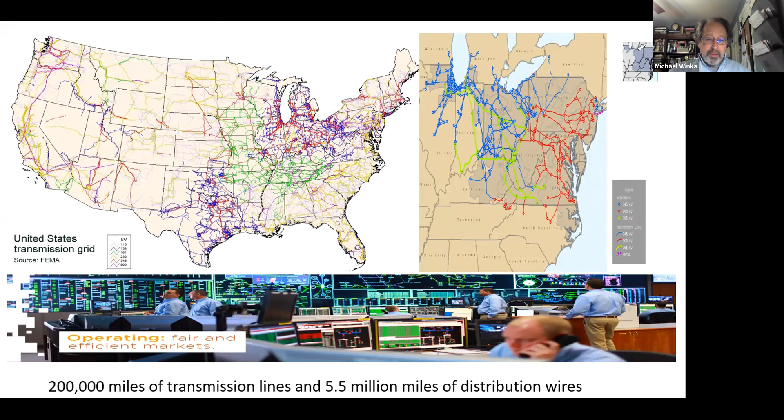Okay, so this is the electric grid. It's huge. You can get an electron from California and move it all the way to Maine. There's 200,000 miles of transmission lines crossing the country. This is the natural gas intrastate and interstate pipelines. There's 300,000 miles of pipeline. And these are the oil pipelines. There's 200,000 miles of pipelines. And you can see most of the gas coming from Pennsylvania and Texas, Oklahoma, the hotspots for oil and gas. So you can traverse the United States 30 times with all the pipelines and wires that we have out there.

And if folks really want to ask a question, you can raise your hand. I might not be able to see you all. Maybe Steve, you can monitor that. If it's a really pressing question, I can stop and answer it. Sure, I'll monitor the chat. Okay, or I'll just look at the participants for a hand.

So 90% of the energy we use to do work is basically from the combustion of fossil fuel, just about that number nationwide. When you burn a fossil fuel, you're releasing the sequestered materials that are in the fossil fuels. Organic material on the earth today, in 1 million years will be fossil fuels. They have emissions. Most of those emissions, NOx, SO2, mercury, cadmium, lead, can all be controlled really well. And I'm an engineer, so don't hold me back for English. Really well with back-end control technologies.

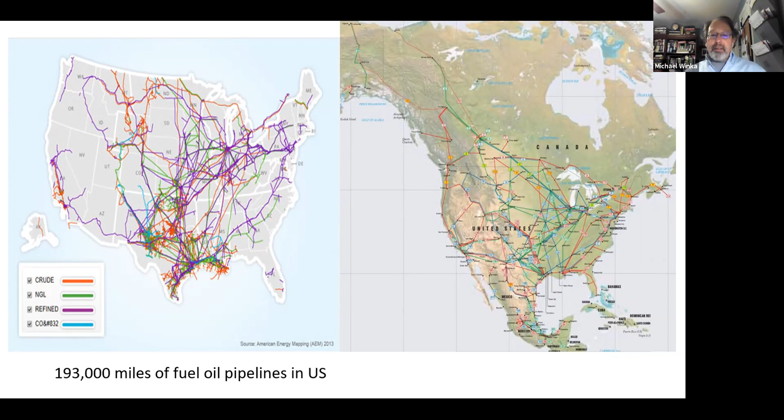And the federal government has its place and the state has its place. And you can do this somewhat from the top down, but you can't do all of it from the top down. It really takes a bottom-up approach to managing this program. And I'll talk about these issues and how you put those things together.

So when we talk about CO2 emissions, this is from the Energy Master Plan. It's great to put these things in sectors so you can start developing strategies. You can see transportation is the largest greenhouse gas emissions in New Jersey. It's over 40%. Residential and commercial, mostly heating of buildings. Electric generation followed with 20%. Industrial, same thing: it's heating processes, thermal processes, burning oil or natural gas. And then the rest, waste generation.

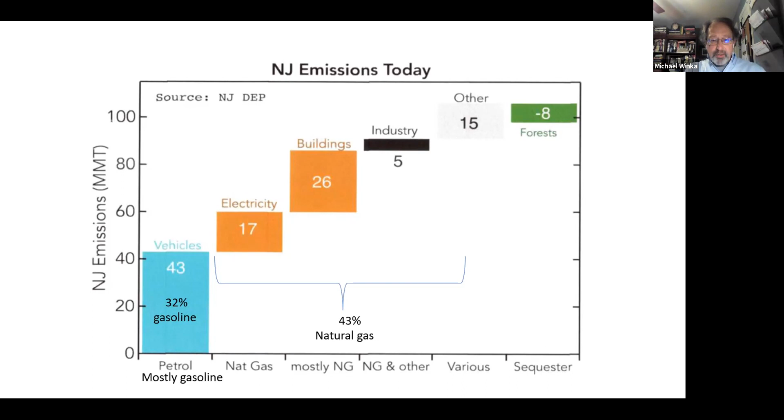You could split that up by the fuel types that generate those emissions. So in the transportation sector, 32% comes from gasoline in New Jersey. But here's the interesting point: in electricity, buildings, and industry, 43% of our emissions come from natural gas. So you're going to build strategies to address gasoline, natural gas, buildings, and the transportation sector. And those are the things you'll see in the Energy Master Plan, and in Middletown's Energy Master Plan, if you build an Energy Master Plan.

So when you put those things together in terms of the goals, the strategies roll out pretty simply. Advancing clean transportation with electric vehicles, advancing clean energy with renewable energy, advancing energy efficiency, advancing building electrification, and a smart grid. So you can tie all this together with smart grid, and you can go through the Energy Master Plan and look at how it sets the goal for 100% clean energy and an 80% reduction in greenhouse gases by 2050. That's the goal in the 2019 plan. It may be changing. I know the federal goal is 50% by 2030. And we'll see how that goes in the Glasgow agreements.

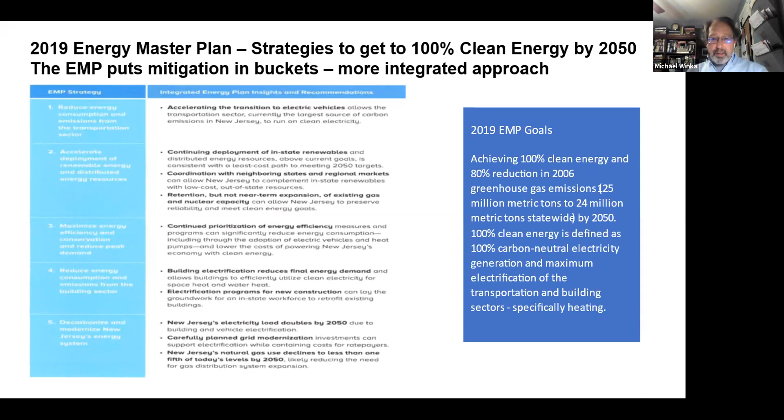You can, again, look at that from different fuel types. So fossil gas, pipe gas, gasoline, petroleum. And you can see if you apply those strategies, the decline in emissions over time to get to the goal. And that was the modeling that was done on the least cost scenario to get to those emission points. There's several different pathways to get to that endpoint, but there's one least cost pathway that gets you there.

You want to do something else? If you're saying you want to roll out electric vehicles slower, you're going to have to do something else that might be more costly in the end. Or if you don't want to electrify buildings, you may have to pay more for solar. So that's the strategy. In the Energy Master Plan, they looked at 12 different variations on different strategies on how to come up with the least cost.

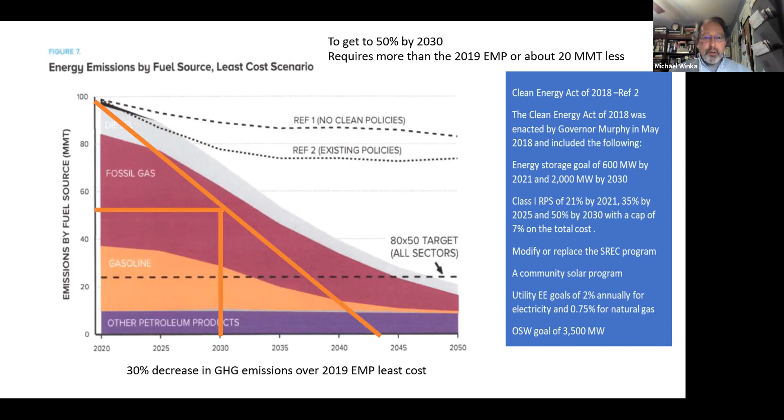But again, if you want to accelerate that and get to 50% by 2030, you can see that bold line that was thrown in there and where you have to improve or increase your policies. I'll talk about that in a second.

So the Energy Master Plan looked at electrifying buildings, electrifying transportation. So electricity is going to double. You're going to go from 75 million megawatt hours of use to 150 million. And you're going to pay for that. You're going to have to build out the infrastructure and you're going to pay twice as much for electricity. But the good news is you're going to reduce gasoline and natural gas and diesel and the cost for that.

So when you net out that I'm reducing paying for gasoline, but I'm increasing my cost for electricity, it's actually more efficient to use electricity than all of these other types of fuels. You're more efficient, you're using less energy, and overall it's about the same amount of cost.

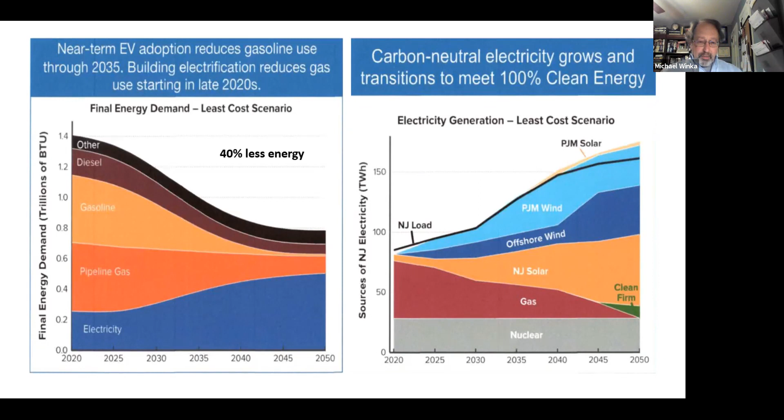And you'll see on the right-hand side of the screen is the increase in clean energy generation over time. We go from natural gas and nuclear about 40%, 50%, depending on the time of year, whether natural gas is high, whether nuclear costs are lower. And then that increases to solar and wind in 2050 with some nuclear baseload staying in.

And this is the cost for meeting those strategies to get to those reductions by 2050. You see this in the Middletown Energy Master Plan, Steve, you reported it, a 0.2% increase in GDP. A 0.2% increase in GDP is $2.1 billion over the business as usual case. And that $2.1 billion is a lot of money when you consider the state's GDP is $600 billion. That's where you get that. It's only a 0.2% increase in the total GDP.

So, and then on the other side of that equation, in terms of benefits, it's about a $4 to $6 billion benefit versus the cost. So you have a benefit to cost ratio of about 2 to 3 times, which anything greater than 1 is deemed to be cost effective. In the modeling that was done for the Energy Master Plan, you have a cost, but the benefits far exceed the cost as you move on.

And that's to get, again, to 80% by 2050, 80% greenhouse gas reductions by 2050, and to get to 100% clean energy, which is defined as carbon neutral electric generation, not carbon free. So you have a ways to go if you want to change that. So in summary, the good thing that came out of, and you can go to the website and look at the presentation that was done.

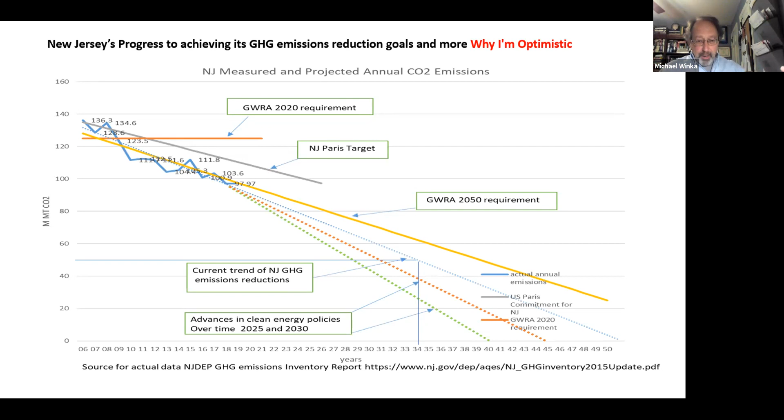So another reason I'm pretty optimistic in terms of where we're going is just how policies grow. I showed you that chart of the existing policies, and the existing policies are not going to be able to take us to 2050. We need more. So I'm going to show you how policies grow and how they expand over time.

So when energy was deregulated, when you can go out and buy electricity and natural gas, people on the environmental side said, people are going to buy cheap coal, we're going to get higher emissions. The countervailing part of that in the energy deregulation law was the renewable portfolio standard. They said, okay, you suppliers that are going to sell electricity, and you may sell cheap coal electricity, you have to have some renewables in your portfolio.

And the way that works is a renewable generator generates electricity. They put electricity into the market just like anybody else. And when they put a megawatt worth of electricity in the market, they get a certificate to represent the attributes, mostly environmental benefits, of that electricity. They get that one certificate, and they get to sell that certificate to an electric supplier who has to comply with the renewable portfolio standard.

And just a short way to make that, here's the rule that gets put in place. The RPS rule says this is the amount of renewables you, third-party suppliers or LSEs, load serving entities, have to have in your portfolio that you sell to customers. They go to the market to buy them. Generators generate those certificates. They sell their electricity, then they sell their certificates separately, and that's how the system works.

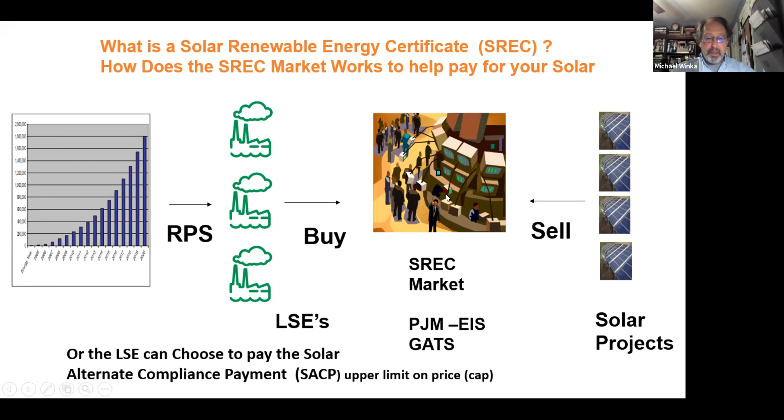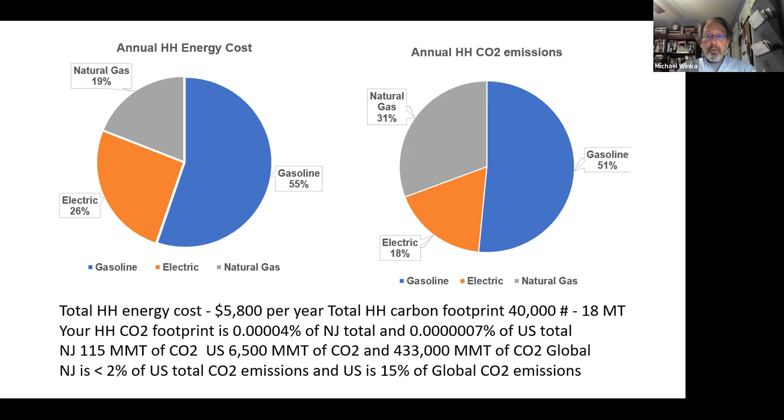And 80% of that cost is in gasoline and electricity, but over 80% of the emissions are in natural gas and gasoline. So again, at the household level, it all depends. Do you want to save energy and save cost, or do you want to reduce greenhouse gas emissions? Some of that is an overlap, and I'll talk about that, but some of that is different policies and different programs.

That's good on an average basis, but you want to know, what am I doing on a monthly basis? You can go to your utility and ask them for your monthly data. They will send that to you. Every utility does that now. But that's monthly electric and gas. You can figure out your mileage on your car by going to DOE and EPA in terms of gas mileage. And every utility now has an energy home calculator. You can go to the utility, plug in some numbers about your home, your age, type of insulation, windows. It takes you about 20 minutes to do that.

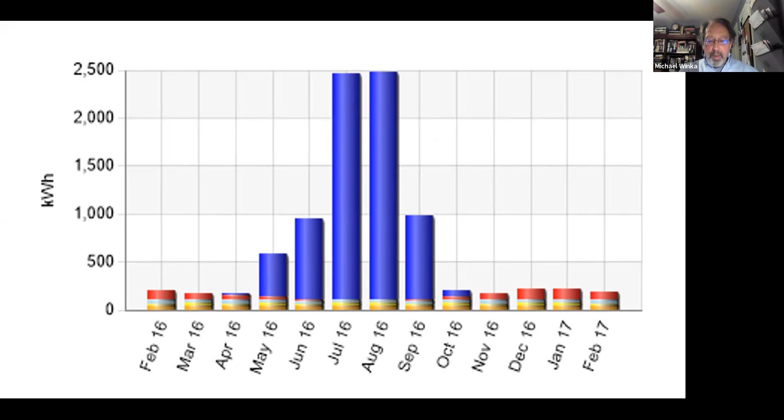And they will spit out a chart for your home saying, here's the electric energy use that you use. And based on the rate, here's the cost. You can see on a monthly basis what you're using, how much you're using. That blue is my central air conditioning system, although a little less than that. You can do that for natural gas on therms in terms of heating and hot water systems and cooking.

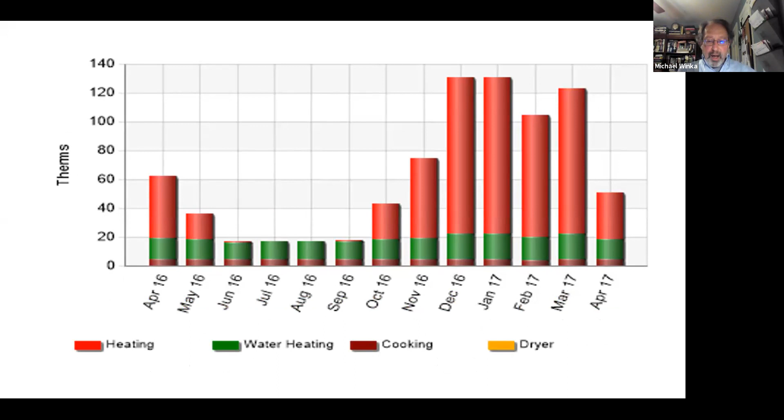Once you do that, you can then take this rule of thumb for building solar. So for every kilowatt of solar that I install, I know I'm going to generate 1,100 kilowatt hours of electric energy. And it's based on the amount of solar that's hitting New Jersey per meter squared and the efficiency of panels. But that's a rough rule of thumb that we use in terms of calculating the amount of energy that's going to be produced for the amount of kilowatts that you install.

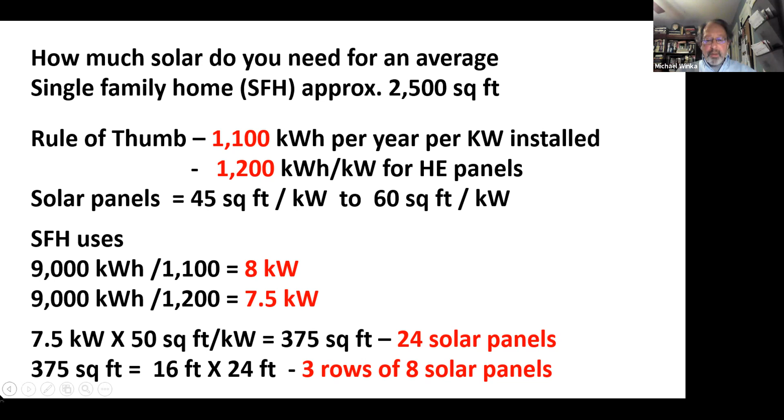And you can just do that in reverse. You need 9,000 kilowatt hours of electricity, you need an 8 kW system. It's going to be about 24 panels on the roof, about 16 by 24. So you can go out and look on your roof. Do I have enough space? Can I put that much solar on my roof? Can I carry the entire load of my building? And then we'll talk about cost.

There's a real simple program that's out there called PVWatts. You plug in the DC size of the system. I put in 7 here. Again, you can put in whatever number you want. You can go on there, it gives you a little Google map. You can digitize your roof space and it'll tell you how much you can fit on your roof. There's average system losses that you put in there. You put in the slope of the roof, typically 20, 30 degrees, and whether it's south facing, east facing, west, and you put in the number for the kilowatts.

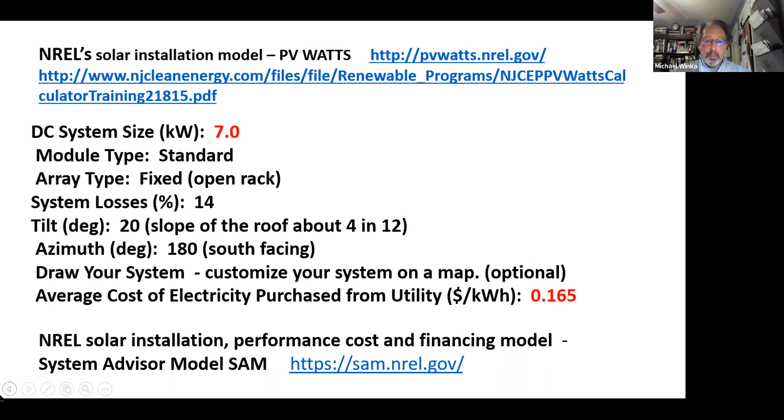And it'll come out with a chart that says, on a monthly basis, the amount of electricity that you're going to generate and the amount of avoided costs that your system's going to generate. Real simple stuff. And every solar estimator that's out there uses this program. It's real simple to use. It's a DOE program, it's run by NREL, the National Renewable Energy Lab, and it's free. You can just go in there and plug it in and play with it. It takes you 5 minutes to put in your zip code or your address, find your home, and then run the model.

Then you can compare your energy use on a monthly basis to what you're generating. And you can see here, I'm using more electricity. On an annual basis, I'm going to carry the entire load of an average home, but during the summer, I'm not going to carry that. And that's where net metering comes in. So net over the year, I'm going to have a 0 electric bill, but in the summer, I haven't put enough solar on the roof to net out my bill during July and August.

What you can do is you can then decide, you can do this one of 2 ways. You can do energy efficiency before and decide you're going to put in a smaller system to carry your load, or you can build a larger system and put in energy efficiency after and carry more of your load and have more electricity that's generated, and be able to make decisions about other things as you go down the pathway.

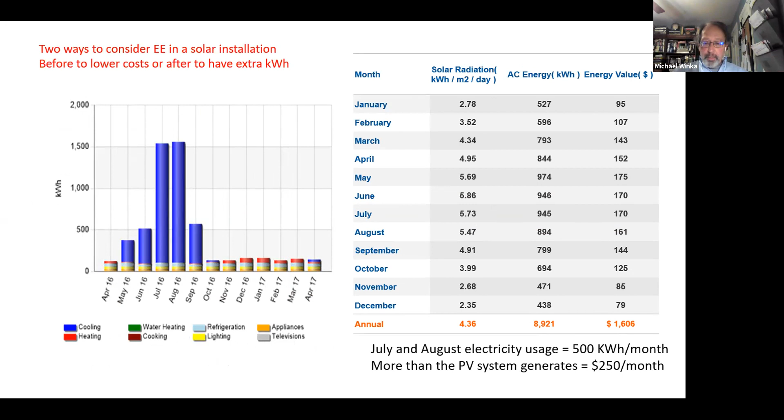And then you have to understand what the cost is. It's $3 a watt installed for that 7 kW system, $21,000. The way you get that, there's a US DOE lab, NREL and LBL, that publishes this data on an annual basis. It's called Tracking the Sun. They will tell you what the cost is for a solar panel in the US on average. They'll do it for residential, commercial, utility scale. They do it by state. So you can look at New Jersey and see whether it's below or higher than average. And typically New Jersey is below average cost because we've been doing this for a while.

You put in that cost, there's a 26% federal investment tax credit. So a 7 kW system will cost you $15,500. To calculate your simple payback period, you have to know what your revenues are. And that revenue is just the net metering avoided cost and how many SRECs you're going to get. In the past, I talked about the renewable generators selling in the market and people buying. That was a competitive system. Now it's a set system.

You get $90 for every megawatt hour that you generate. It's called the Successor Solar Incentive Program, SuSI, but it's SREC 2. You get $90 for this first tranche of 150 megawatts. So you know what your SREC values are going to be, and you know you're going to get them for 15 years.

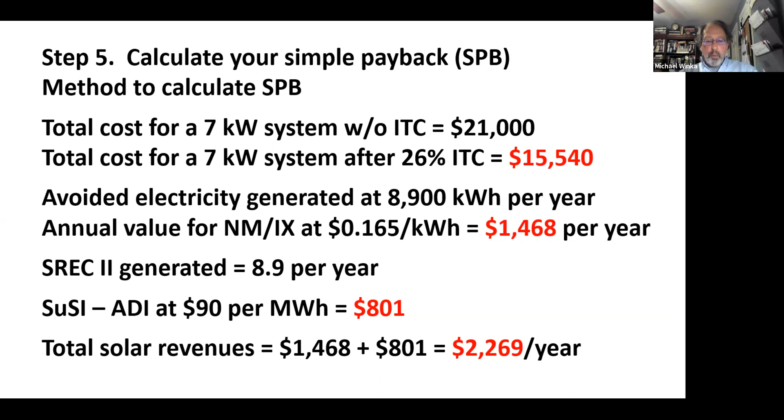You know what your avoided cost for electricity is. It's just under $1,500 for avoided cost. That's 16.5 cents per kilowatt hour for almost 9,000 kilowatt hours per year. You know what your SREC values are. Your total revenues are $2,269 per year.

You just divide that into the cost of the system with the investment tax credit, and installing that system will get you a simple payback period, not including the cost of money or discount rates and all of that other stuff, but a simple payback of less than 7 years, just on the avoided cost of electricity and the SREC. So, a simple return on investment of about 14%, maybe 15%.

Pretty good, not bad in terms of investments. Probably beats what your 401k or your pension plan is doing currently. So, a pretty good investment along the way.

You can pay for that system up front with cash, or you can finance it. You get all the benefits. If you don't want to do that, you can lease your roof space, or you can do a power purchase agreement. You don't get all the benefits, but there's no upfront cost and no maintenance of the system. You get the avoided cost for electricity, but all of those other benefits roll to the lessor.

So another thing to talk about is batteries. Batteries are high cost now. Their costs are coming down just like solar. In 2003, solar cost $10, $12 a watt installed. It's now $2 or $3 a watt. So batteries are coming down, but right now it's pretty expensive.

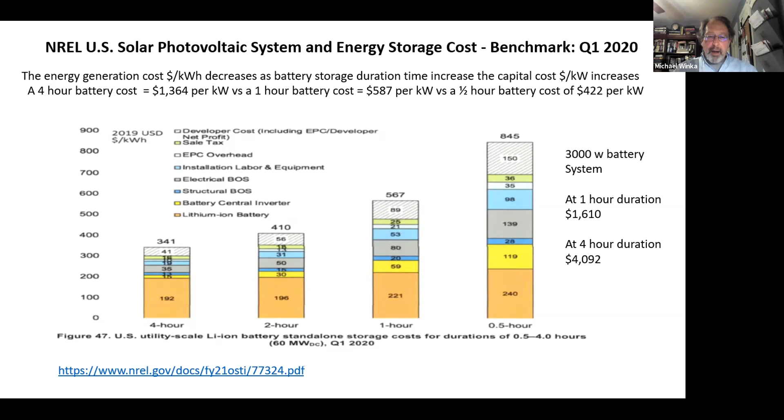At this point in time with net metering, you have to think, what do I want batteries for? I want batteries maybe if the grid is out for some period of time. Do I need all of those batteries to do that? You can think about how many or how few in terms of batteries. You can dip your toe in this water for a little bit of cost and see how it goes.

We talked about solar and storage, and I said that's the linchpin to putting this all together. We're going to talk about EVs and then electric heat, building electrification, and some of that. So the way you're going to change the oil and gasoline demand curve is with electric vehicles. And the only way we're going to get to 50 by 30 is changing that oil and gasoline demand curve. And the only way to do that is with electric vehicles.

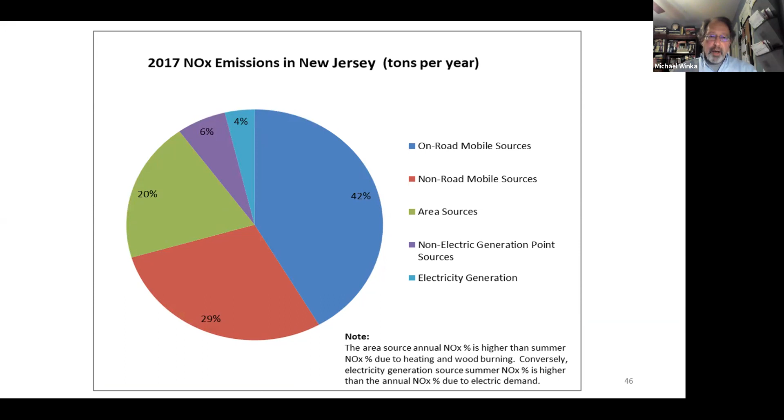The other benefit that comes along with that is the NOx emissions and particulate emissions from vehicles are pretty high. So you're not only getting CO2 reductions, but you're getting NOx reductions and particulates and a bunch of other things. But to buy a new EV, highly expensive. So a Model X, $86,000, even a Mini electric base price at $31,000. You want to replace that battery pack, it's going to cost you $15,000.

But the good thing is because there's a number of EVs on the market, and they all got a rebate from the federal government, they're lower cost. There's dozens of EV models that you can buy used out there for under $20,000. You can buy a used Leaf for around $10,000. It probably has a good life in the battery, but if you want to replace the battery, $5,000 to replace that battery, stick in a level 2 charger, that's $17,000.

You get 0.3 kilowatt hours per mile. You get an 80-mile charge. It's not great. The Model X has a 328-mile range on a charge.

But to think about this, if you had a 40-mile round trip to work 5 days a week, and you're going to go 10,000 miles with a vehicle that drives an average 25 miles per gallon, you need 416 gallons. That uses about 48 million BTUs, and the cost on an annual basis at $3.20 is about $1,300. To drive that electric vehicle the same miles per year, you only need 3,536 kilowatt hours.

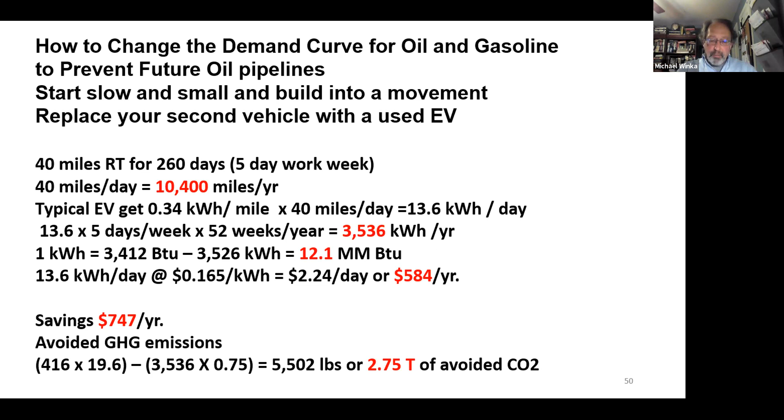But here's even better, and that's why I talked about solar for so long. If you take that magic number we talked about, that rule of thumb, 1,100 kilowatt hours per kW installed, divided into the 3,536 kilowatt hours per year to drive that 40 miles, you need a 3 kW system. With the investment tax credit, it costs you a little over $7,000.

Take the vehicle that you just bought used with the charger, plus the 3 kW solar system, so $24,000. Your avoided cost for gasoline and your SRECs are about $1,600. So it's a return on investment of about 7%, a 14-year simple payback period. Not great, not really a good investment.

But what vehicle can you buy today that actually appreciates over time? As soon as you buy a vehicle, it depreciates. This vehicle, and you're not going to have it for 14 years, just an example, but that vehicle will pay for itself over time, and you get 4 tons of avoided emissions.

So that's what I'm talking about: you have to start thinking about how to connect this, not just building solar on your roof, but saying, I'm building enough solar to charge one of my electric vehicles, and I'm going to run my transportation without emissions, and I'm going to get some payback for doing that.

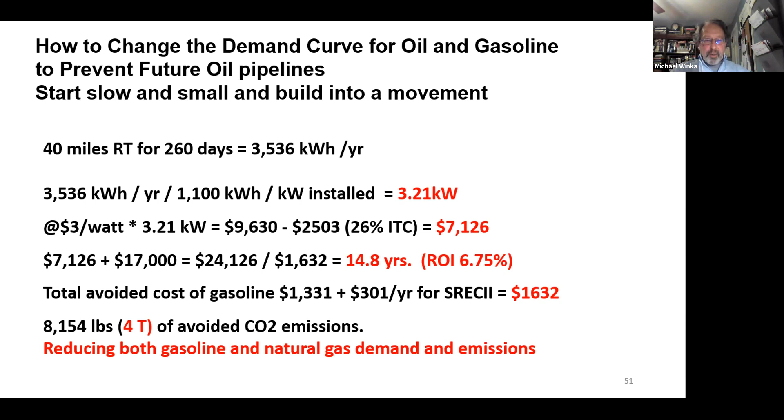So an electric vehicle not only reduces emissions, but it saves you money over time. And that's the thought process we have to start to think about, how you put these things together. The next thing we'll talk about is electric heat. The thing that's replacing natural gas heating is an electric heat pump.

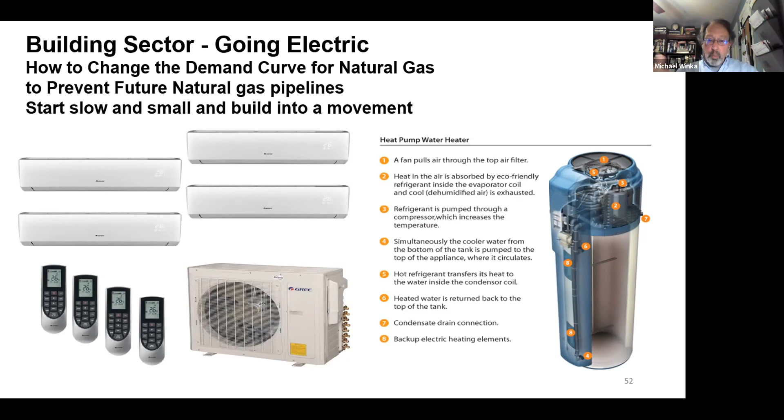They're very efficient. They can work down to about 0 degrees. As it gets colder and colder, the efficiency becomes less. So people are a little nervous about replacing a natural gas heating system with a heat pump. But what you can do is dip your toe in the water and replace your water heater with a heat pump water heater.

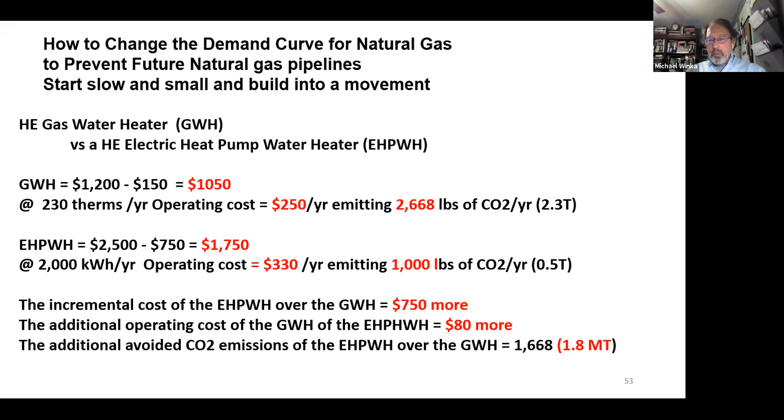It costs more to run the electric heat pump, but you're avoiding about 1,000, well, more like 1,600 pounds of emissions. So it costs more to buy it, it costs more to run, but you have lower emissions. Why would you do that? You're not saving money with an electric heat pump.

But again, if you start to think about how you connect this together, you need 2,000 kilowatt hours to run that heat pump on an annual basis. Divide that by 1,200, that's a more efficient solar panel. You need 1.5 kW of solar. It costs you, with the investment tax credit, $3,300. Your avoided cost is about $320 a year.

You get a couple of SRECs at $90. So your revenue from that is $500. You pay off that 1.5 kW system in 6 years. If you connect that to your electric heat pump hot water heater, it's less, about a 10-year payback. So connecting these things together makes the economics of it even better.

But you're going to be reducing your emissions, 2.3 metric tons of avoided emissions, and you're starting to reduce the demand on the gas side. And the advantage of an electric heat pump is you get to take the electricity that you generate and store it in your heat pump.

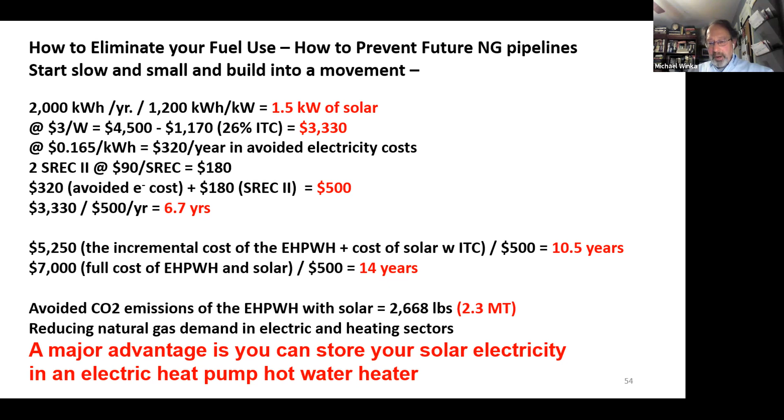It's just another storage device, just like a battery that will store. So you run your electric heat pump, store your hot water, and run your hot water when you need.

So just in terms of trying to think about how you put this together, can we put enough solar to run our entire home? Run your electric vehicles, run your heating, run your cooling system. You would need 7 kW to run your cooling system, about 7 kW to run your heating system, and about 7 kW to run 2 electric vehicles. That's a 30 by 30 foot area that you need in solar panels. Cost you about $63,000. But again, you're going to get that return on investment.

Not everybody can shell out $63,000, but you can start to think about how you put these things together over time. The good thing about these systems is they're modular. You can put in 3 kW with power optimizers, and you can expand the system next year when you decide to buy a heat pump or when you decide to buy an electric vehicle. So solar on your roof is expandable, but can I cover my entire roof with solar panels?

If you go to that PVWatts system, you can put solar on the east side of your house and generate electricity. It's not the 8,900 kilowatt hours, it's only 7,600 kilowatt hours, and you can put it on the west side of your house. You can even build it on the north side of your house. Different installation operations for doing that, but you can.

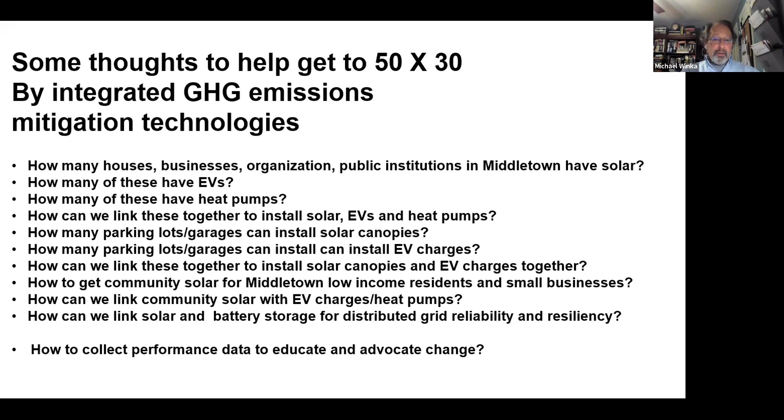And I'm willing to answer questions if you have questions, or if you're tired of me talking, I can just go away. There were several questions. I haven't announced them.

Lee had asked if PV solar is so cost effective, why doesn't JCP&L convert to solar generation and save me the trouble? So you would have to find a big space. If you wanted to carry the entire load for JCP&L, they would have to do that in a large area. So can they rent out every one of your roof spaces? That's an interesting concept about whether they could do that. I think they will get there.

Once you start changing their bottom line, and now it's 5%, I think actually it's about 7% solar in New Jersey. You get to 10, 20% solar, and even before you get to 20%, they're going to start to think about, and they're already doing this with energy efficiency, how do I run that program so it works for me? PSE&G did run a loan program, very expensive. The loan interest rate was like 16% to have them get their money back on the weighted average cost of capital. So they are starting to think about doing that. So they can do that.